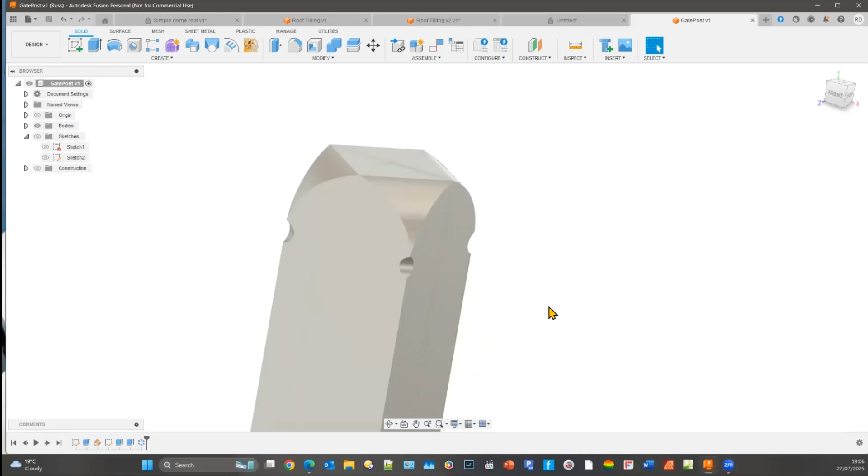So let's just go back in the timeline on this one, to our sketch. So the first sketch basically was to create the bottom of the actual post, okay? And then we move up, and that's our post.

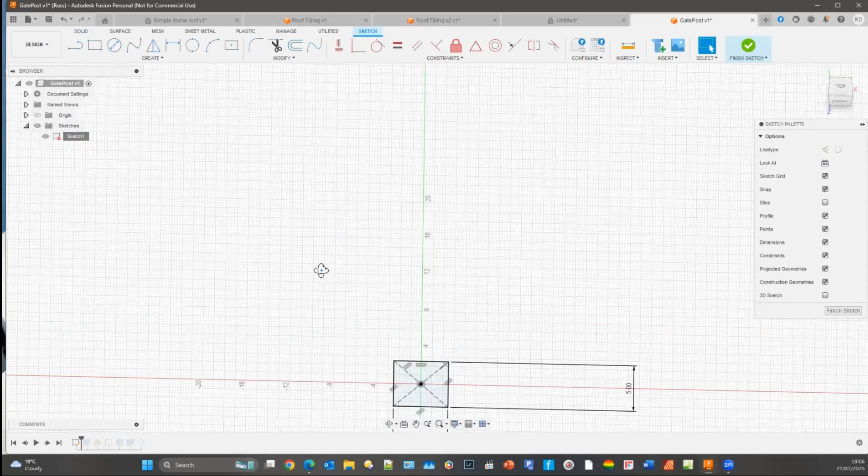Now the post will end up being a bit bigger than this, so really if you're doing this sort of thing, then this post needs to be a quarter of the size that you want it in width and depth, and you'll see why in a moment.

Now the next stage on this one is we've got to create a pattern, if you like, a template that we can create the shape at the top of. Now I tried a few ways on this one, and the way that I've come up with is this one.

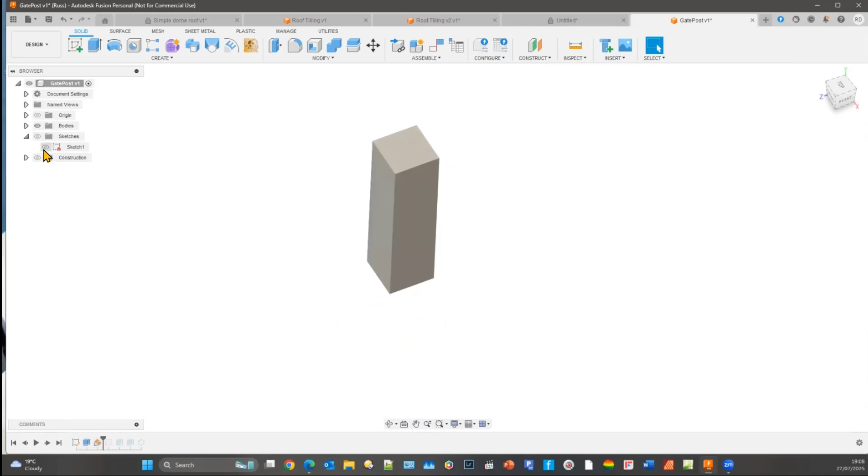Plane, tangent to face or point. Let me just move on one so we can see it. Construction, plane. Right, so I've added a plane across this point here.

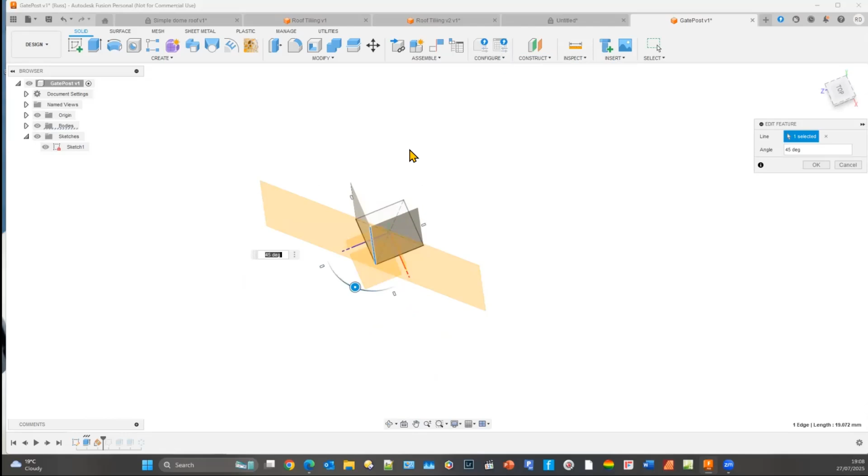Move on - and where's it gone? There it is. So the plane is on here. Now when you put this plane on, you can edit the feature. So by adding that plane on at an angle on that edge, you can then alter the angle of it.

Now I want it to be 45 degrees because what we're going to do on this, we're going to draw a pattern on this plane that we then use as the template to cut away the top of the post. Okay, so that's the first job done, is we have the plane on there.

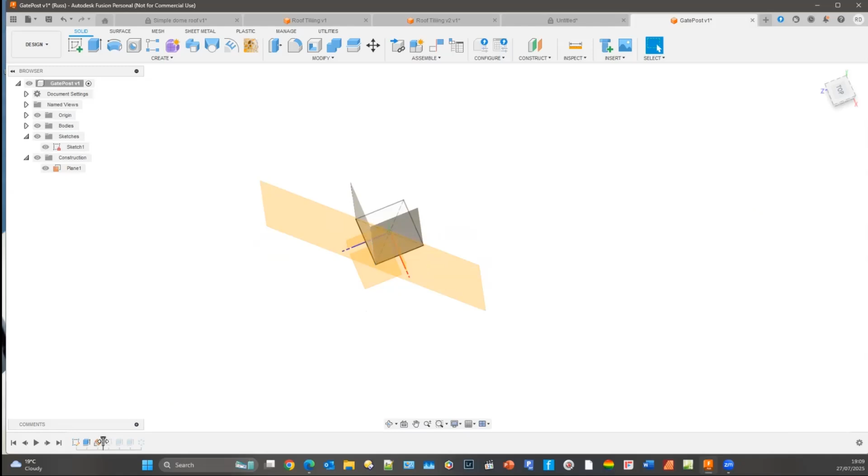Now let's put the body back in. Now what we're going to do is draw a shape on here to extrude back this way and cut into here. Now one of the problems why it was sent to me in the first place is that what we can do then is we can go into sketch mode and we can sketch on this plane.

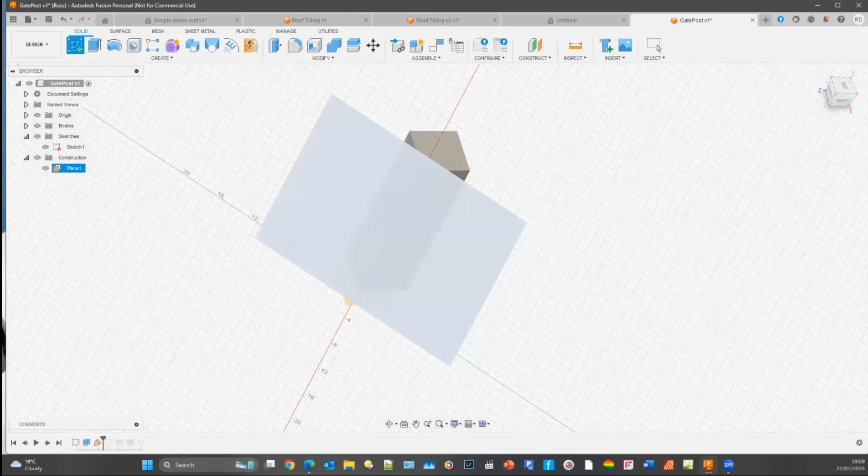So if we go in there to sketch, we're going to go onto that plane to sketch. I can draw and go on and do a curve from the top down to the bottom, etc. But there's no guarantee - you can see if we look there, because we can't catch up with the edges.

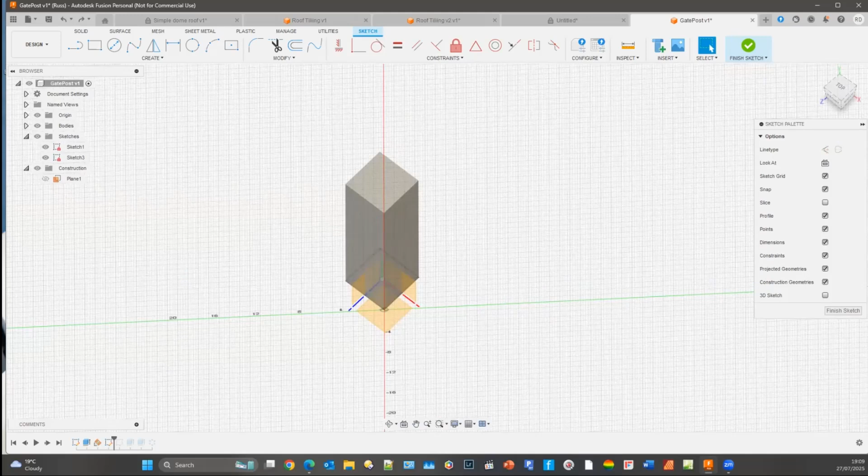So let's go back a moment and finish that and come to this one. So you can see what we've done here is on the plane that we had, we've put a projection line. So if we put the plane back in again, go into edit mode and then edit that plane.

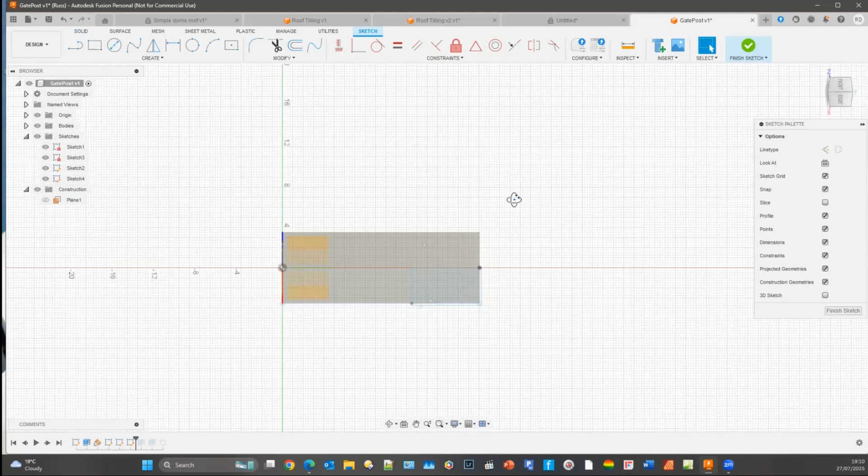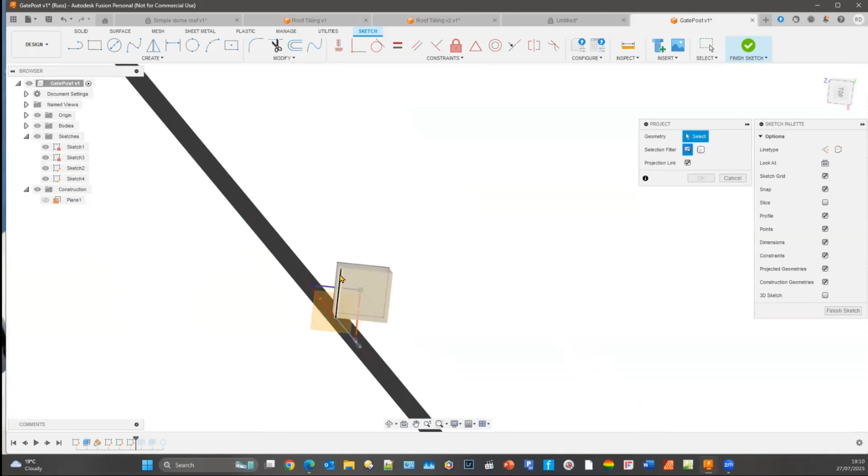Now what I can do, let's get it up at an angle so you can see it, is that if I now come into create and project with a P, and if I click on that edge, can you see how the red line is appearing on my plane? So it's projecting that edge onto the plane.

Difficult to see. Now over this side, I've done one already and it's purple. You can see it's lining up with that purple one. So that then gives me an edge where I can do the curve to. So let's come out of that one a moment.

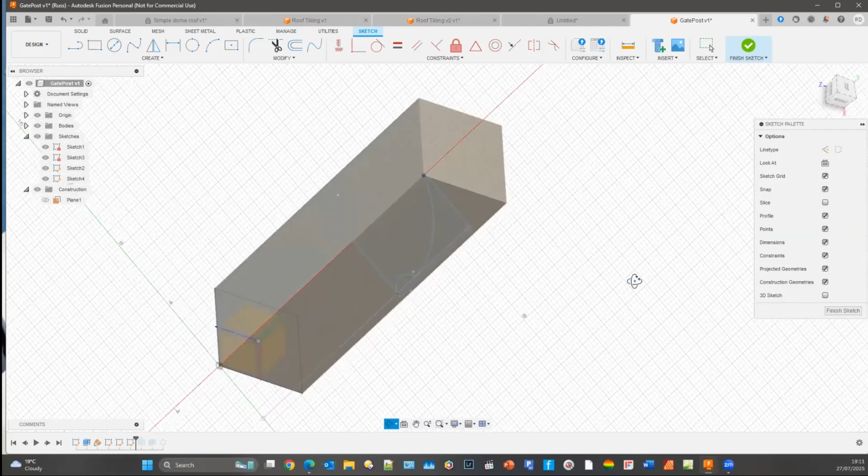And then you can draw your curve on it. We can't quite see the blue, can you? Let's turn the bodies off. There you are. So what I've done now is draw my curve, the shape that I want.

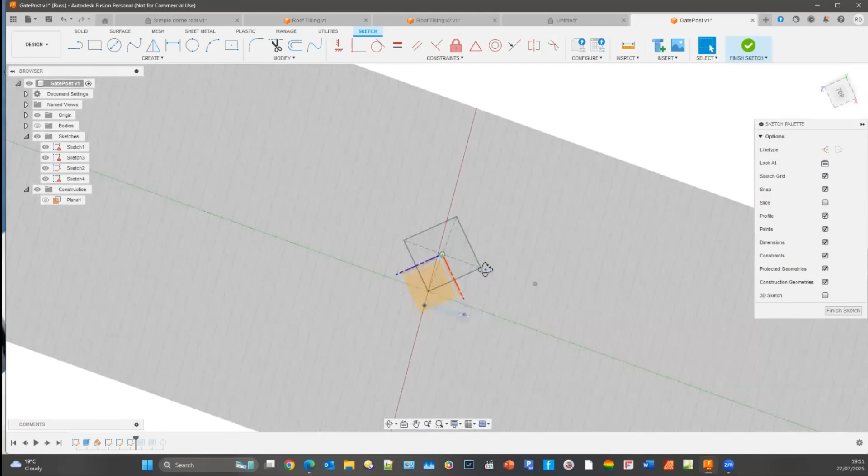And I can draw it on this plane that I'm on, but let's go down there. I want to get at the top angle really, so you can see what I mean. Put the body back on. You can see the shape in there, and it matches up with that corner, so I can now extend that one through to there.

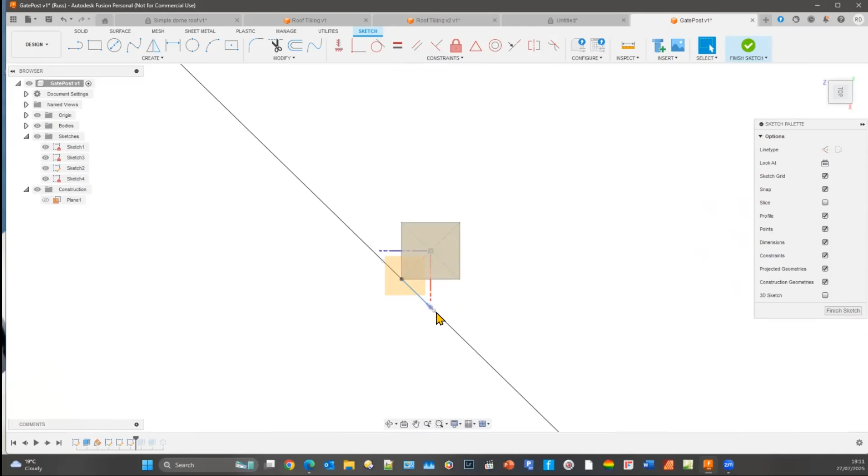That's why the plane was done at 45 degrees in the first place. So let's finish that sketch and come back up. And then basically you've drawn an outer square as well.

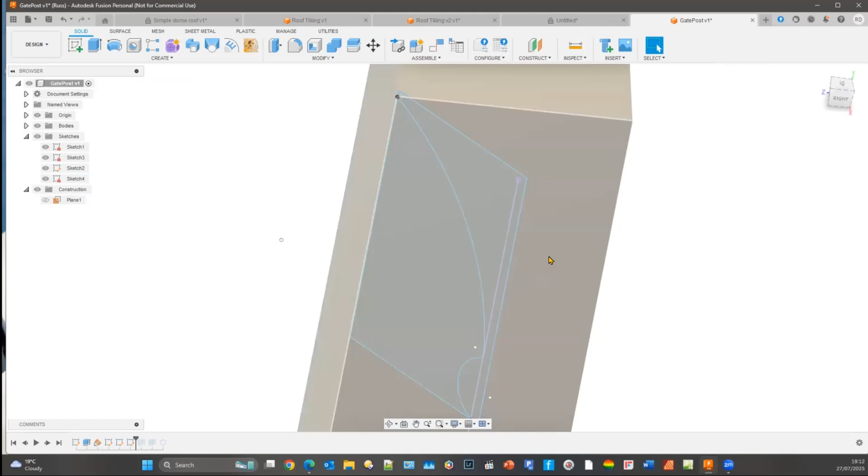So that's the shape, but that's the shape we want left. So we draw a square around it, and I always put the square a bit bigger, because if you draw it exactly, you might leave a sliver behind. So draw your outside line. Therefore, this shape here is the one we're going to cut away.

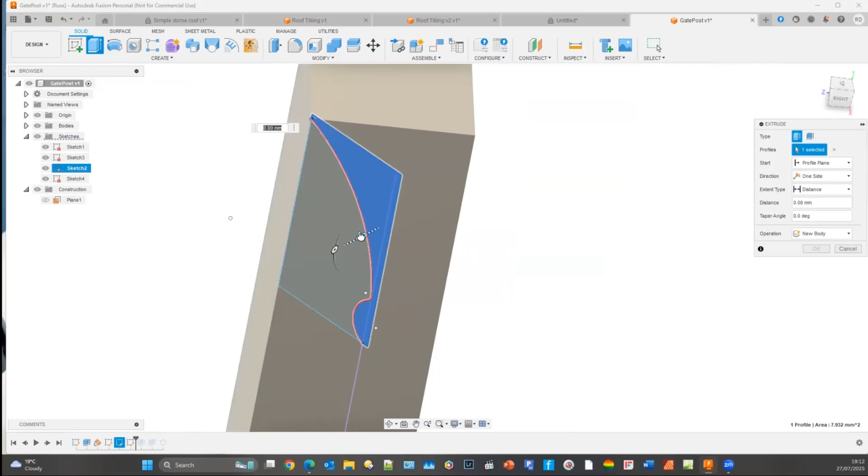And when you cut it away, it ends up looking like that. Let's just go back again. If we highlight that one and we go into extrude, you can see there, it's cut away, okay?

So that's our next move. Let's turn the sketch off now for simplicity. So there's basically, you can see one corner. So all we're going to do now, that was me just making the gate post longer.

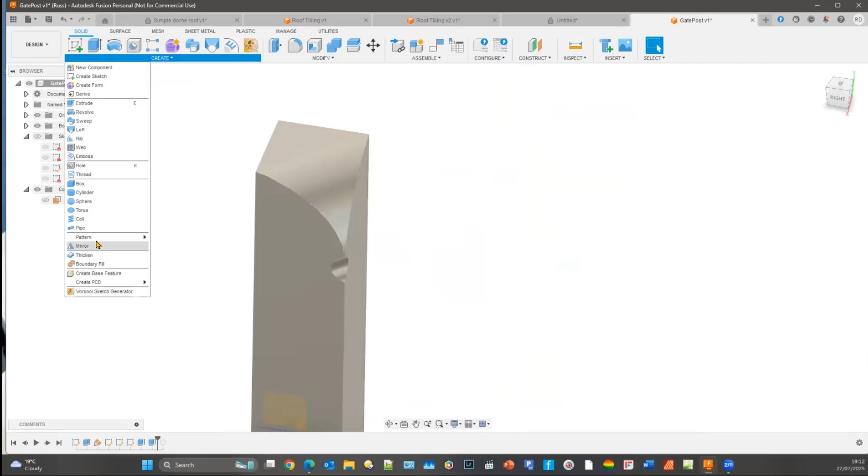We then do a create pattern, circular pattern, choose the body, which is that one. Choose the axis, which is going to be that back axis there, and go on full, and I want 4 of them, and we end up with the shape that John was looking for on the top of his fence post.